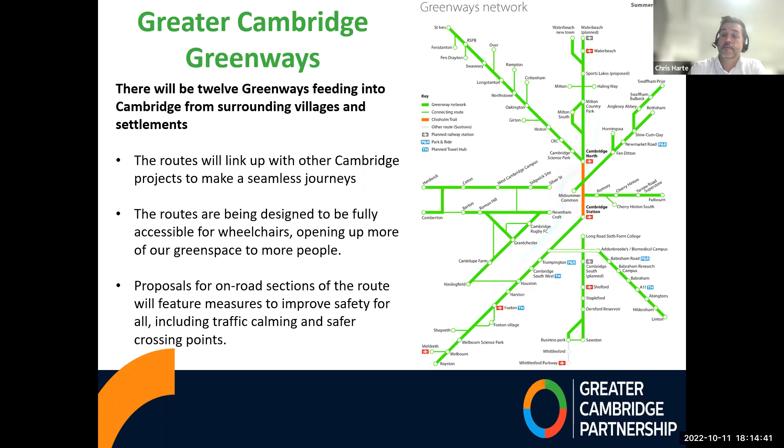It's a massive network, although much of the network is within the highway boundary. There are parts of the alignment which run through private land, through public rights of way, through floodplain, through conservation areas, which means the designs we come up with need to be sensitive to all of that. So yeah, it's a challenge to deliver, but we will get there.

This slide shows a summary of the timeline of the Greenways program. I'll jump to the 2018-19 area, where we undertook public consultation on a number of the Greenway routes, engaging on specific alignments. The GCP Executive Board approved proceeding to the design and implementation stage during 2020 for those routes.

In 2021, we appointed design consultants from Atkins and WSP to help us design and deliver through the various stages of the Greenways program. We also have a term contractor we're working with, and since we've got a lot of network to deliver, we want early discussions with our contractor to make sure we can deliver things on the ground.

Atkins and WSP have been looking at the concept design, examining all the routes that were engaged on in the previous public consultation, to home in on key opportunities and challenges we might face. We're at the stage where we have a rolling program of concept design delivery for each of the 12 individual Greenways, and we're rolling out a program of engagement.

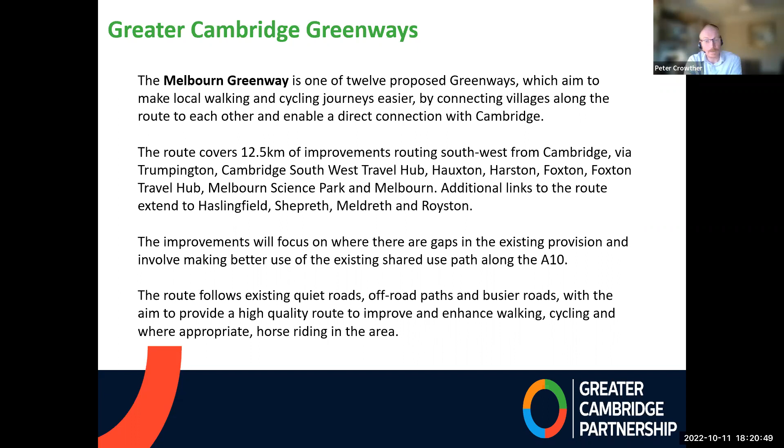Historically, the route was broken down into a number of sections, and previously included sections for the Southwest Travel Hub at the top end, and also the Foxton Travel Hub in the middle, which isn't shown. Those two proposed schemes are now being implemented separately to this scheme, so no longer included within this scope, but we are collaboratively working and coordinating with those projects as they get up and running.

So as you see here, the section is broken down into 8 sections. Hopefully you can all see it, though it's a little small, but I have larger scale plans I can bring up later. Generally I'll give you an overview of what's going on and some key issues and concerns. This first slide shows the proposals along that corridor.

The first section is the A10 north of Harston, effectively from the connection with Trumpington Meadows, or the bridge over the River Cam at the northern end, heading south and connecting at the top end of the village of Harston to the existing infrastructure already there. Section 2 is an offline route that connects in with the Haslingfield Greenway, or the proposed Haslingfield Greenway.

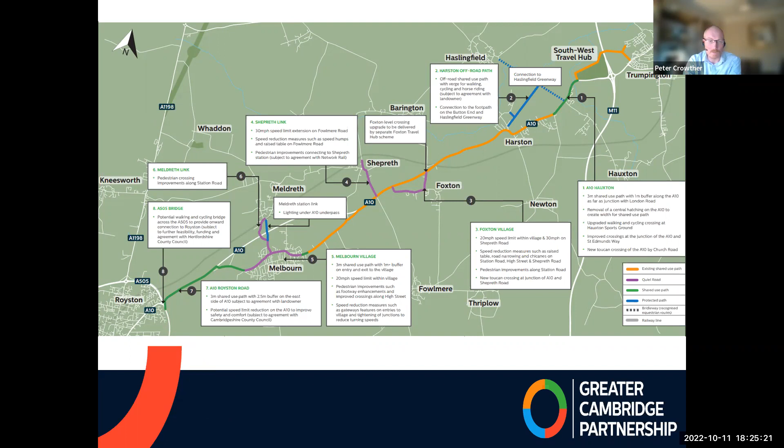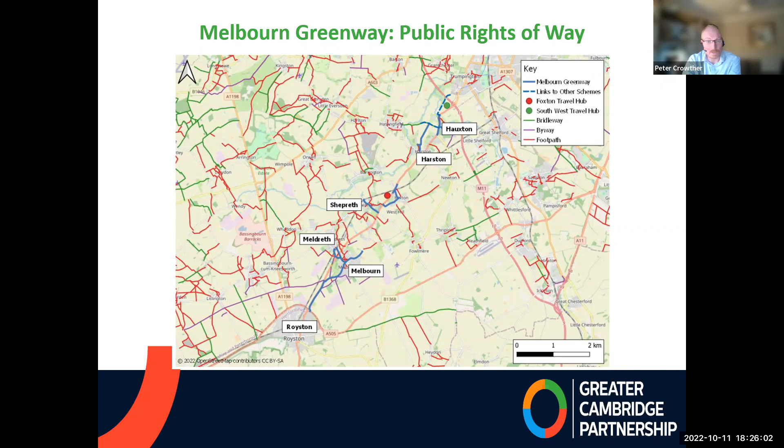If you drop onto the next slide for me, this plan shows—it's quite difficult to see—but this is lifted from the definitive maps for Cambridgeshire and shows the extent of existing public rights of way within the vicinity, and how this can create better connectivity with those adjoining routes. So yes, it's to enhance and provide better connectivity throughout the length of the A10 corridor. As you can see, there's quite a proliferation of public rights of way along that corridor. Next slide, please.

So obviously, I'm now going to go into a little bit more detail on each of those sections. Just let me move this off my screen.

This increases the risk of conflict for users on the path. Heading south from here, there's also poor connectivity across the road to new and existing residential developments and properties, and as we all know, high traffic flows on the A10, including high levels of HGVs.

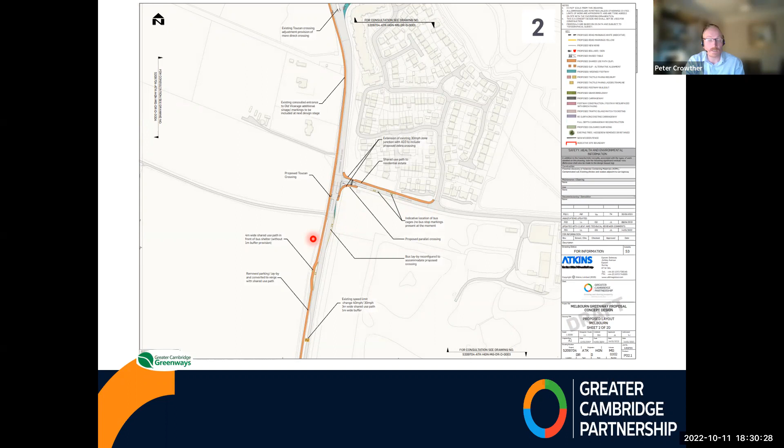This section then continues further south along the A10 corridor, heading south until it reaches - sorry, I'm just - apologies, reaches London Road. At that point it connects into the existing provision on the shared use path on the western side, heading down through Hauxton and on to Harston.

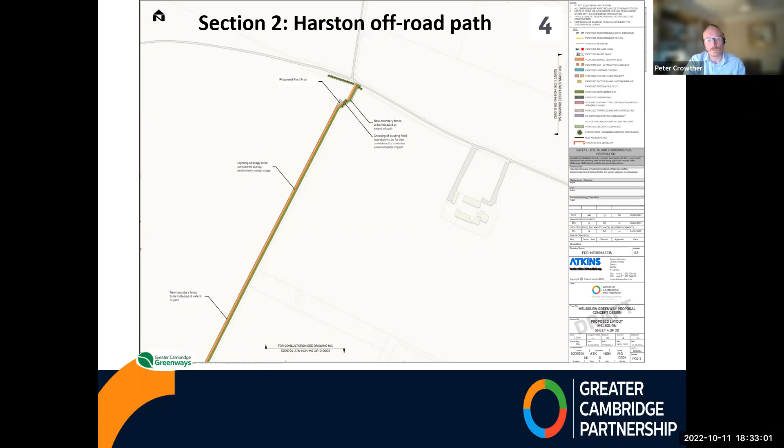If you carry on to the next screen, as you can see, it just continues south. Just about two-thirds or just beyond halfway down, the existing public right-of-way swings off to the west, so the section south of this is actually going to be new.

We need to talk to the landowners and gain agreement for the permissions to create that, but it follows the hedgerows all the way down, connecting in with Burton End Lane at the bottom end.

We're having discussions at that southern end with regards to the actual route, but this is the current one shown on the plan. There may be an opportunity to move it across onto the existing highway or road that sits on the western side of the allotments currently there.

It also, as you can see in the middle of the plan, provides a new connection with the existing public right-of-way as a sort of T shape. Sorry, I haven't got my pointer. Just there, thank you. So it creates a connection there.

So generally, with regards to these, yeah, sorry, this is effectively that section for section 2.

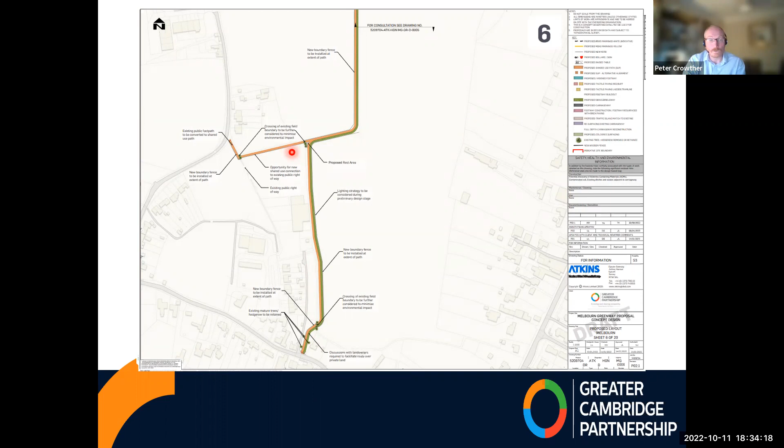Section 3, Foxton Village. This is the section that runs through Foxton Village. Obviously, the issues and opportunities in this location are that it's of local character, and the widths of the existing highways and footways do limit opportunities for significant improvement.

But with these sort of local characters, it's probably best to try and minimise the impact on that setting. Known issues are things such as traffic speeds and multiple access points across footways to private drives and garages and so on.

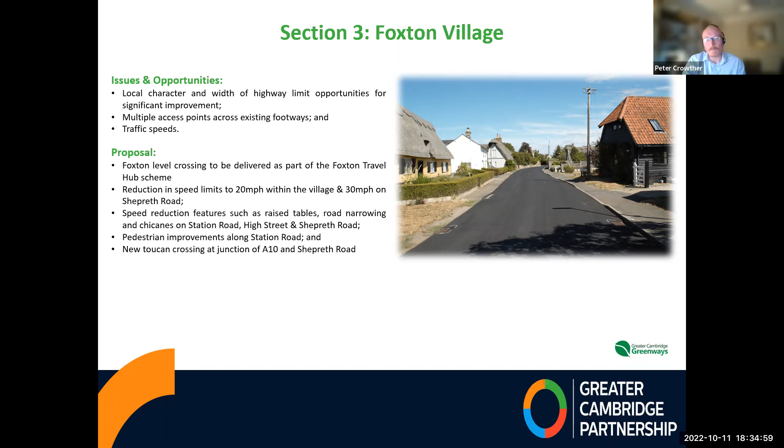If you go on to the next screen please, I'll run through the proposal. With regards to the village settings, what we're proposing, and it's a consistent approach for a number of village settings, is to try and reduce traffic speeds by speed reductions, looking to reduce those to a 20-mile-an-hour speed limit or zone through Foxton Village.

Look at reducing or introducing traffic calming, typically speed humps or bumps, tightening up of radii, and providing level surfaces for footways across side roads. So I suppose low key, but generally in keeping with the local character, with the intention to calm speeds and raise awareness and perception of other non-motorized users using that route and alignment.

So if you can go on to the next plan please. And again, it continues down through the village of Foxton, heading in that southwesterly direction to the extent of the residential dwellings.

Obviously, at that point, as there are no more residential dwellings, the existing speed increases, so it would probably be hard to create or maintain a 20-mile-an-hour speed limit beyond the extent of the village. However, we would look to provide a 30-mile-an-hour speed limit from that point down towards the A10.

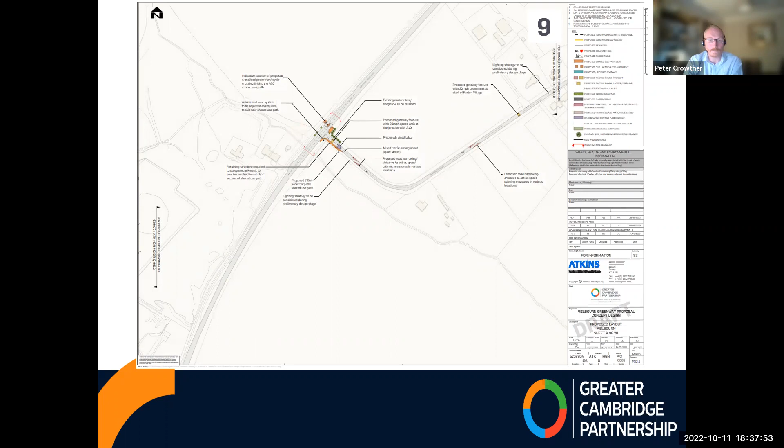This is the link to Shepreth, section 4. Again, similar to Foxton Village - local character and the widths of the highway limit opportunities for significant improvement.

One thing to note is that at the junction with the A10, there is limited visibility there, so that will influence the design. On the concept designs, as you'll see in a minute, it's showing a proposed priority for non-motorized users at that junction. That's the intention, but we need to make sure that's safe, and we need to go away and look at that junction specifically.

We're also getting traffic counts and speed counts just to substantiate any proposals we may take forward, or to understand those issues going forward. We need to understand that junction a little bit better to come up with a final solution, so that may develop or change as we go forward - just to make people aware of that.

However, the link to Shepreth itself is very similar to Foxton Village - just trying to keep speed limits down once we're in that road, trying to get it down to 20 miles an hour. But because of the character and nature of this first section, enforcement may result in it being about 30 miles an hour. Generally we're just trying to reduce the speeds in this section by means of traffic calming and associated traffic measures.

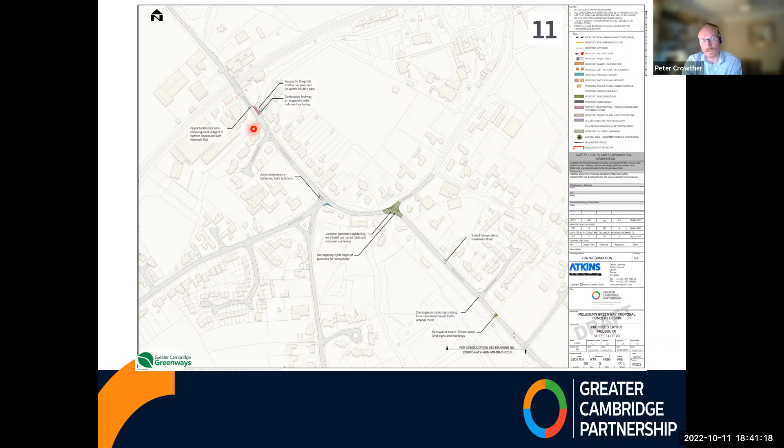Next one, Melbourn Village Centre, again not too dissimilar to Shepreth and Foxton. However, given that there's high levels of traffic, it's a little bit more densely populated. We would look to do a little bit more with regards to measures. Similarly, local character and width of highway limit opportunities in certain locations. There are multiple access points from drives and side roads. It's a busy local village centre. Once you get into the centre, there's quite high curbside activity with regards to servicing and parking, and sometimes traffic speeds are in excess of the posted limit.

If you go onto the plans for me please. At the northeastern end, just by number 12, is where the existing active travel corridor, or non-motorised use path, shared use path, enters into the village. At this location it starts to narrow a little bit, so we'd look to maintain a consistent width into the village. We're looking at reducing the speed limits on entry to the village again, as we have with the other villages, and continue that shared use path on the northern side of the footway as it heads into the village.

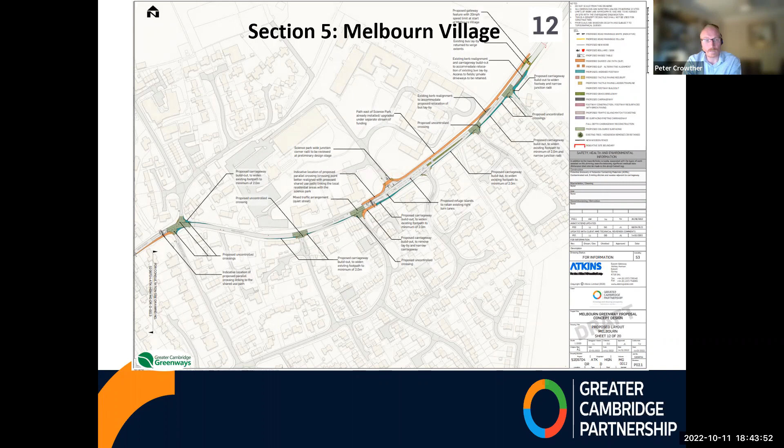Go on, next slide then please. Heading in a southwesterly direction, the route continues through the village. It comes to the main signal control junction with the High Street, and Station Road I believe it is, heading off towards Meldreth. We're looking to provide an improved junction arrangement there by reducing the overall crossing widths, again improving permeability and accessibility.

So in effect, the southbound traffic lanes, there's currently two - a straight ahead and a right turn. What we're currently proposing is to reduce that down to a single lane, to reduce the overall impact, improve the crossing provision across that space, and improve the urban realm in that space as well.

With a lot of these, as I said, these are the proposals, but they need to be substantiated with traffic modelling and traffic speeds. They're currently being undertaken, so you may see traffic counts going on in and around the local area as a number for all these schemes. But once we receive that data, we can understand how that junction will work based on these proposals, and if we need to make changes because of that data, we will do that. The general aspiration in that location is to improve accessibility and permeability across that junction, not only for pedestrians, but also for cyclists and other users that want to turn right towards Meldreth or pass through that junction.

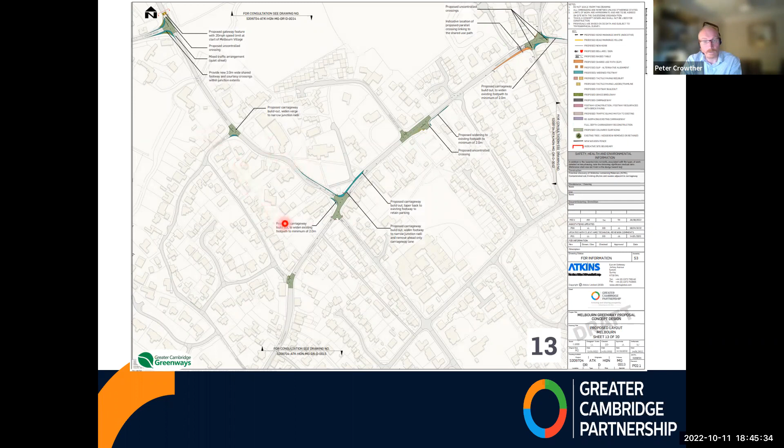This route then continues south now. If you follow, number 14 heads further south, heading down out through the village, again continuing much the same as earlier on within the route and alignment - general traffic calming, speed reduction features.

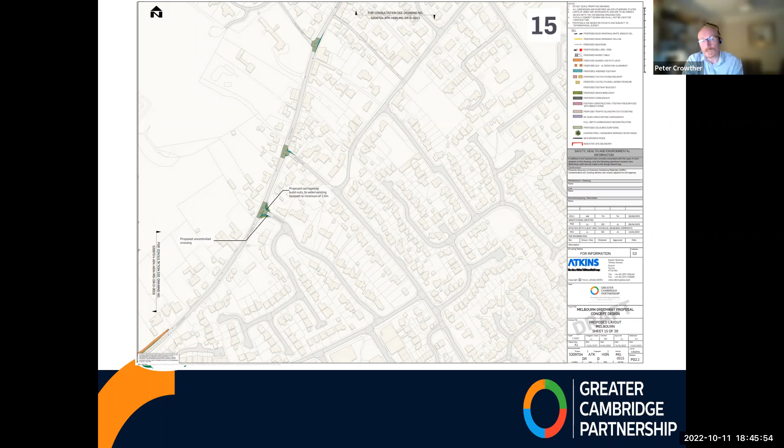Next slide please. At this point, where it heads or leaves the village centre or the residential area, because there's a wider verge or the creation of more space, we can now go to an off-road solution and utilise the verge space on the southern side of that road, so we just need to get all the users onto that space. There's a configuration there, getting people from either side of the road back onto the single side and vice versa, depending on the direction you're coming from.

So that route will then continue as an off-road shared use path to the south of the highway. We look to reduce the speeds for that section, but because it's now off-road, it will no longer be a 20 mile, it'll be a 30 or 40 mile an hour section through there. But again, creating the appropriate distance or offset from the highway in that location to give those levels of comfort. It's a wide verge there, it's a shared use path.

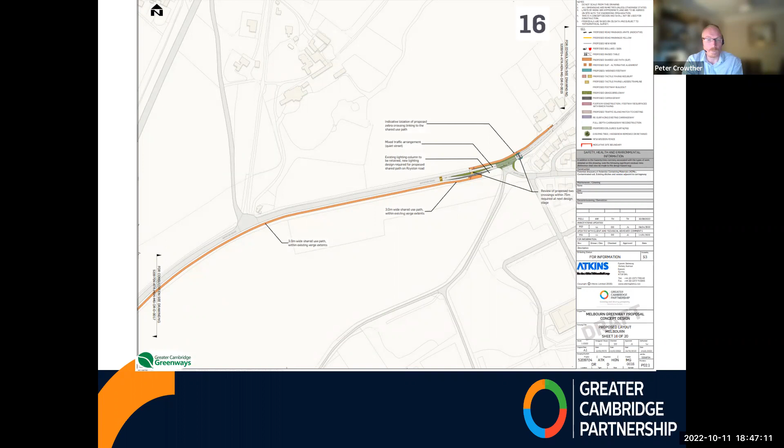Beyond or to the south of that shared use path, there'd still be a wide verge so that it can be used for equestrian use and/or dog walkers, so that existing provision will be retained along there.

The Meldreth link is broken into two sections, but it's just called the Meldreth link for this purpose. Effectively it's the village link, following Station Road from Melbourn Centre, then Station Road again - everything seems to be called Station Road here, so it's hard to differentiate. It comes from Melbourn Village Centre, heads up to a T-junction, turns left, runs under the A10, over the railway line, and back down to join the railway station. So we're calling this the village link, and like most of these, it's a light touch approach.

Users will be in the highway, but we're trying to reduce speeds through traffic calming, speed reduction, reductions of radii, traffic signs and road markings, just generally to calm the whole area. Again, it's of local character with multiple access points, so we need that consistent design approach as proposed throughout the other section of Melbourn Village.

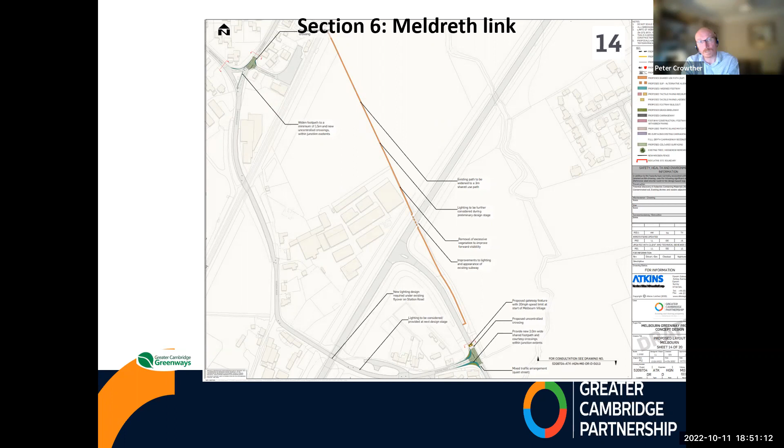Some of you may be aware there are proposals to improve that station and access to it by providing ramps onto the southern, London-bound platform, and improving connectivity to the stairs that go up and over the railway line. We're also improving the highway link through speed reduction and traffic calming in that section.

A10 Royston Road - this section basically ties onto the bottom of the Melbourn Village Link, connects onto the A10, and heads south towards Royston. Touching on why we're proposing this side rather than the other, where there's existing infrastructure in part - primarily because the proposed bridge across the A505 is on the eastern side of the roundabout rather than the western side. It's on the eastern side because of engineering difficulties, utilities, and a number of issues associated with the western side.

So obviously it's more logical to create a direct link, rather than trying to provide two crossing points across a very busy high-speed road at this point, and further down, which is probably hidden by the crest of the curve as you approach the roundabout at Royston.

So just a bit of rationale as to why we're proposing it to be on this side. Also, there's a wide verge here, so providing appropriate levels of offset, 2.5 meters, to improve that location. Introduction of a minimum 3 meter wide shared use path, which will extend all the way down.

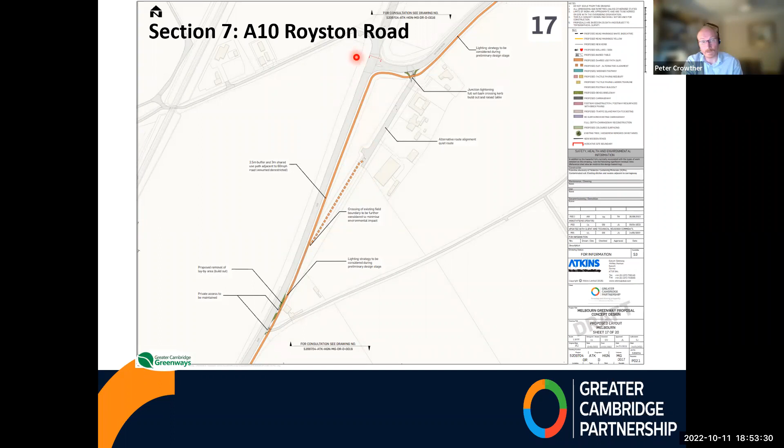Also, there's potential opportunities going forward to create connectivity with the public right-of-way on the western side of the A10, just to the north of that junction as well. That's something we'll be looking at, which has been raised during earlier stakeholder engagement, and something we'll be taking forward.

Heading further south, it continues down across. There are a couple of pinch points where it gets a little narrow, and we'll need to understand what the solution will be there. It's potentially looking at a little bit of land take from the landowner in that location. We've spoken to the landowner or their agent, and that seems to be an acceptable way forward with them.

Or perhaps, if it's a shorter length, a reduced width over that section. But it's only a very short section. Again, this just gives an indication of some of the issues or concerns along the route.

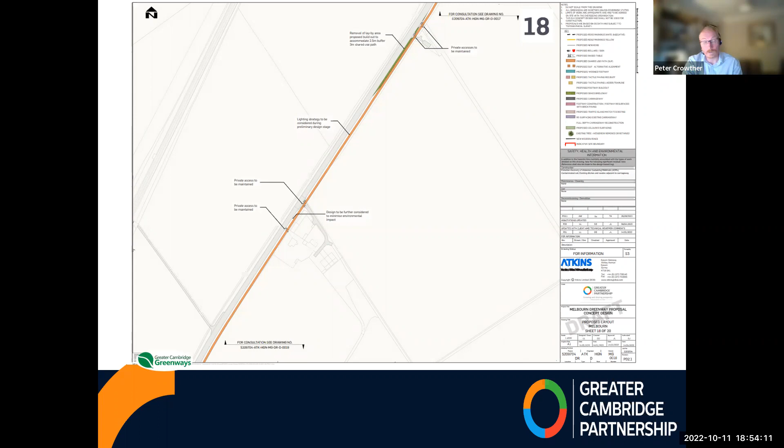If you go to the next slide, and probably the next one actually, because it gives a more overall picture. If you next slide... oh no, sorry, that was the last one, was it? Okay, sorry, that's the one.

So as you can see there, it heads along the A10 corridor, and as we get to that brow of the hill, shall we say, it then drops down to the roundabout. We'll look to turn left, head through into that field that's there.

We've spoken to the landowner there, and they're quite positive with regards to the proposals. We'll follow the field boundary along that route with a new shared use path, or in this case it is showing a segregated path, creating a new link to where the structure will be across the A505.

As I said before, the location there is just shown as a guide. It may be further east, it might be slightly further west, but generally what we're trying to do is connect into a sensible location on the southern side, and also the existing network and paths that go around that residential site in that location.

If you go on to the next slide. It's worth adding that we know Hertfordshire are consulting at the moment on their local cycling and walking infrastructure plan, which shows that connection across the link here. So we cross the boundary here between Cambridgeshire and Hertfordshire.

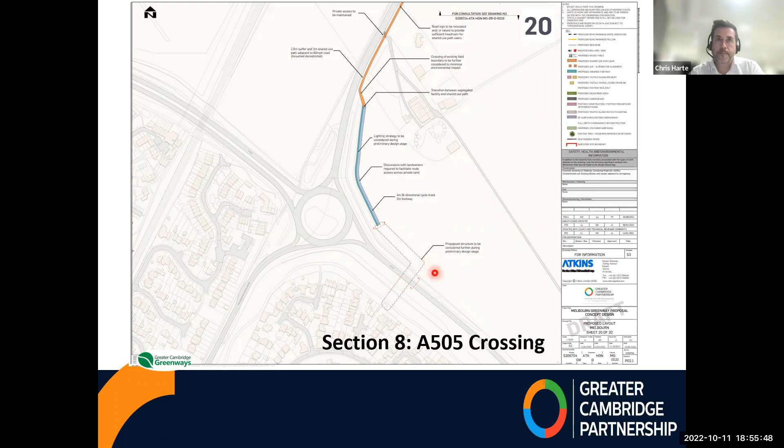Oh, was there one with the bridge? That's it. So again, just talking about the A505 crossing. The little image there is a typical bridge, it's not what we're proposing for that location.

And as the more eagle-eyed will see it says the A2, so it's just showing an example of an active travel crossing. The section at the bottom is from that location and gives an idea. That's not to say that's what the bridge is going to look like, but it gives an idea of what it could be, to take forward and provide costings, and so on and so forth.

So that does create that connectivity and link with Royston, improving connectivity throughout. And as Chris said, it is into Hertfordshire, and we are talking to Hertfordshire with regards to developing that idea and concept and taking it forward.

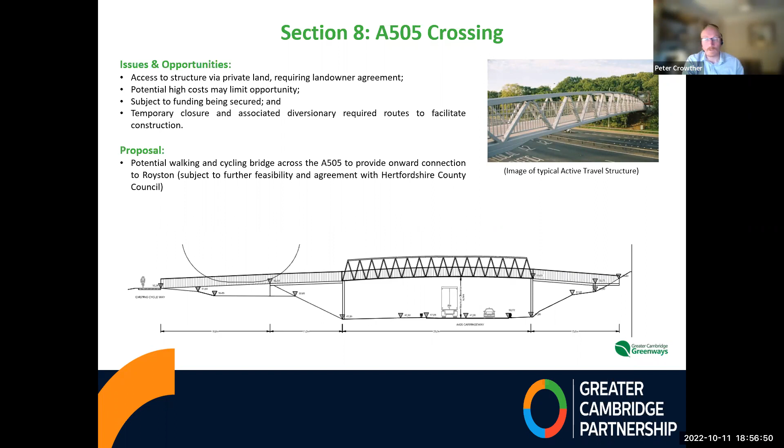So yeah, that's probably rambled on a bit there, but we'd usually have a bit more interaction as we go along. Happy to take questions. Thanks, Peter.

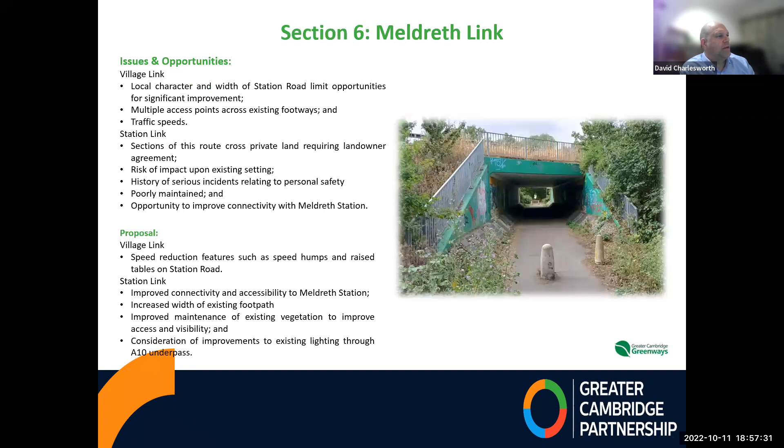A question here for Peter and Chris: in the A10 section, Hauxton maps sheets 1 to 3 includes references to consider removal of safety barriers to increase available width for shared use path, and consider removal of guardrails to improve available width for shared use path. Will this not reduce safety for pedestrians?

Obviously the existing guardrails there, you could assume that they're there for a reason, and probably a good reason. Obviously these are concept designs. With regards to the guardrail there and that raised curb height, being local, I knew that road was of a faster speed, but also there's a structure behind.

So that's a very short answer, but in a wider context, to create that more openness and an open feeling for people using that space, and remove the risk of handlebars clipping structures and so on. It is a valid point, and we need to understand why they were put there in the first place. We're hoping to mitigate that by understanding that, and also because we're looking to reduce speeds and change the perception of that space with regards to the movement of traffic on that road.

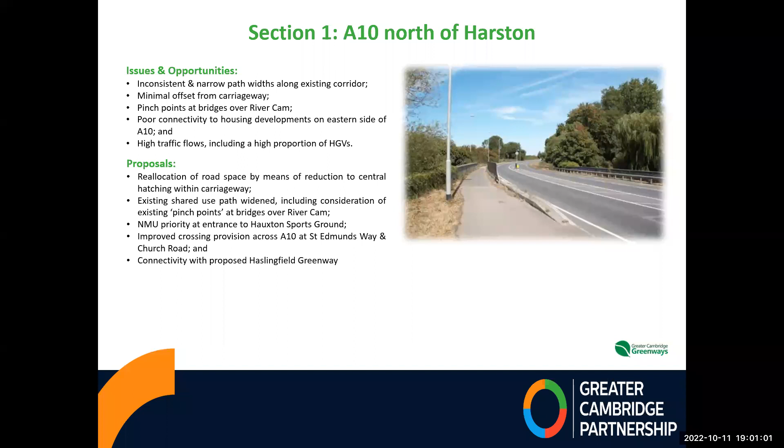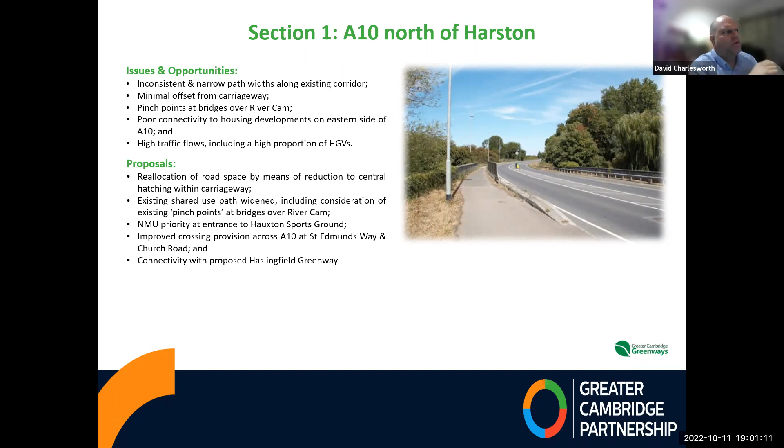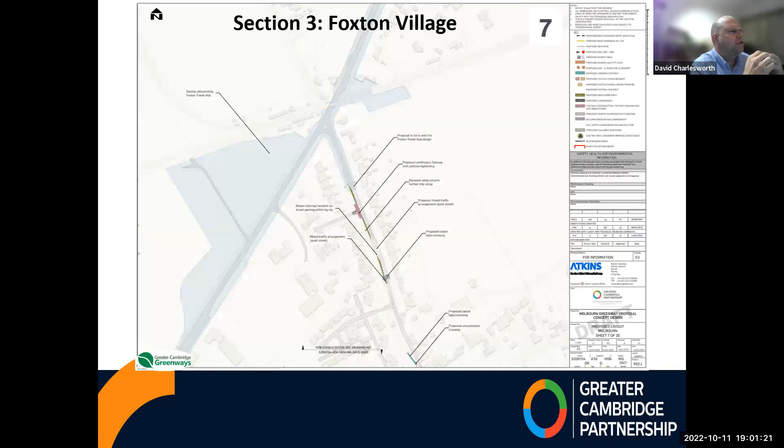I'm going to move on then to a question in section 4, linked to Shepreth. Will the existing pedestrian path from the A10 most of the way to Shepreth Watermill be widened to a multi-use path? Does that make sense? So in section 4, the link to Shepreth: the existing pedestrian path on the A10 most of the way to Shepreth Watermill, will it be widened to be a multi-use path?